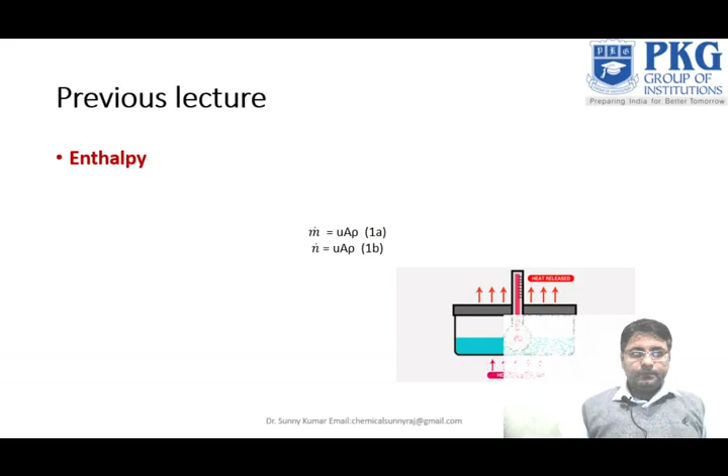Okay, so now we will start our lecture. In the previous lecture we discussed enthalpy and the effects at constant volume and constant pressure, and we did some examples related to this at constant volume and constant pressure related to enthalpy and heat capacity. Also we defined what heat capacity is and how you can relate it in your surroundings, and related examples of heat capacity we did.

And in between we also discussed about the measures of flow. So these things we discussed in the previous lecture. We also defined the specific heat at constant volume, which is the change in internal energy over change in temperature. And we also discussed the specific heat at constant pressure, which is del H upon del T at constant pressure. So these things related to heat capacity we discussed in the previous lecture, and we also solved examples related to this, and also discussed the measures of flow.

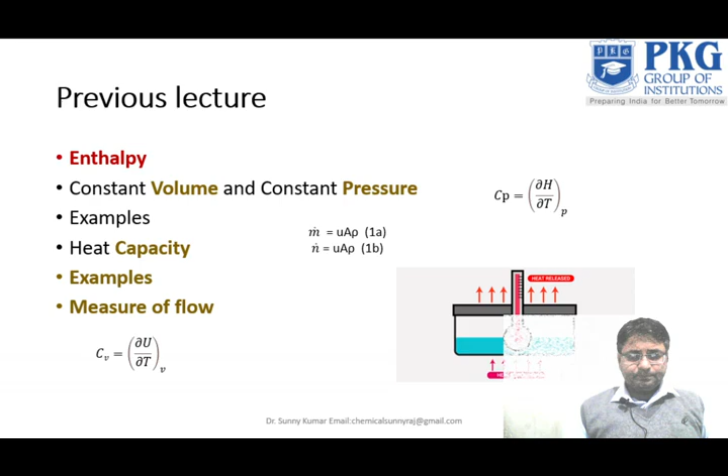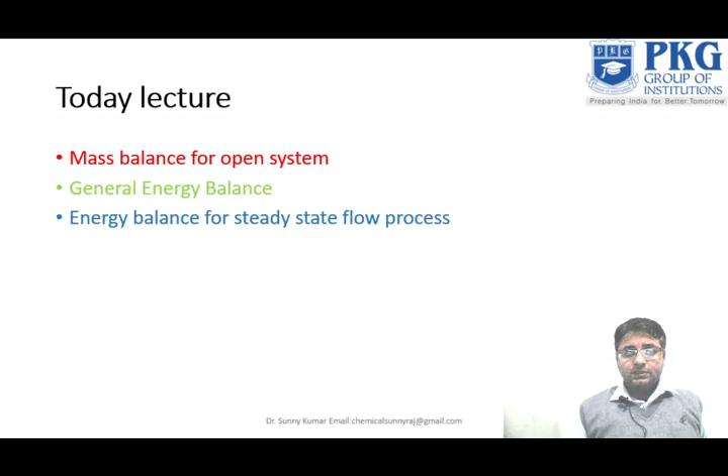So in today's lecture we will discuss about the mass balance for open system and the general energy balance for steady state flow process, and related examples of this. So this is what we will discuss today.

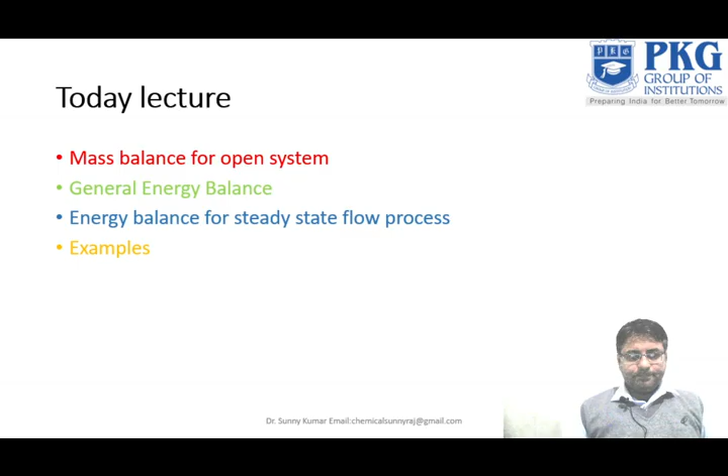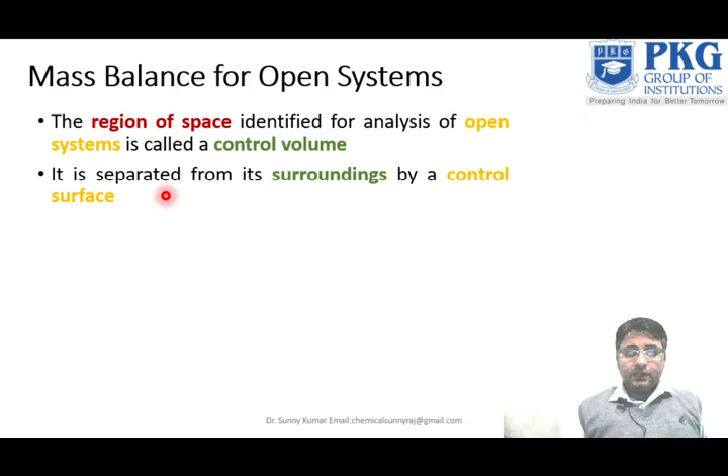Okay, so now I will tell you about what is the mass balance for the open system, how we can define the mass balance for an open system. The region of space identified for analysis of an open system is called the control volume. It is separated from its surroundings by a control surface. The fluid within the control volume is a thermodynamic system for which mass and energy balance are written.

Because mass is conserved, the rate of change of mass within the control volume, del m cv divided by dt, equals the net rate of flow of mass into the control volume. So the convention is that the flow is positive when directed into the control volume and negative when directed out.

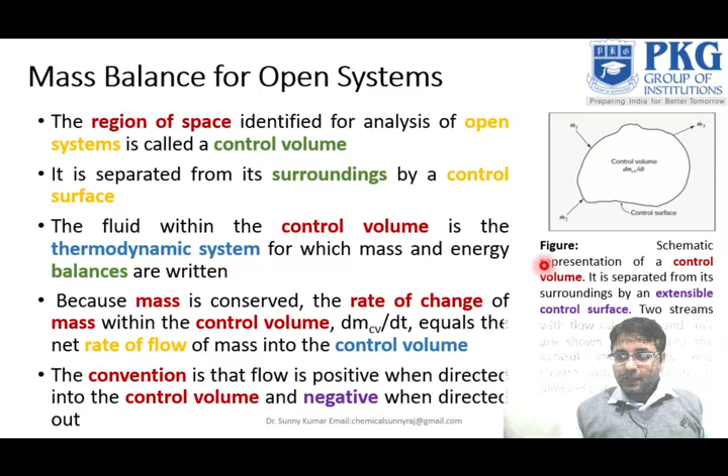For the control volume, the second term, which you can represent if you see the control volume, so you have seen that one. So there is M1, M2 in, and M3 out. So you can also write M3 as positive direction, out is positive direction, and M1, M2 is in negative direction. So you can easily write like this.

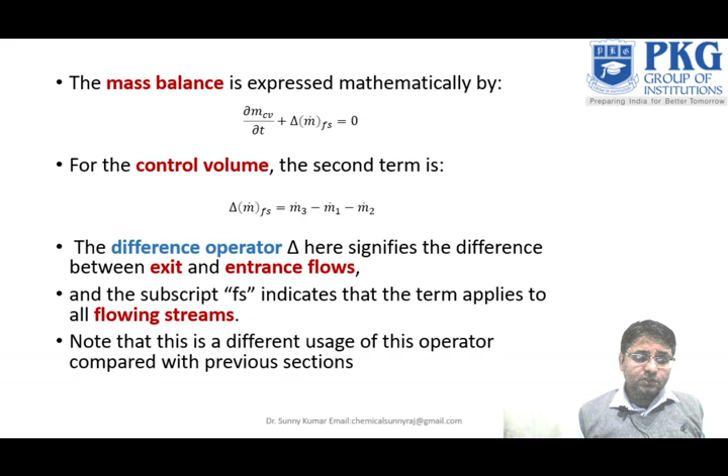The difference operator delta here signifies the difference between exit and entrance flow, and the subscript Fs indicates that the term applies to all flowing streams. Note that this is a different usage of the operator compared with the previous section. In the previous section we also used these types of terms, which were separated, but this is a different term we are using here.

Where the difference is between an initial state and the final state, both usages of the difference operator are common, and care must be taken to ensure that the correct sense is understood.

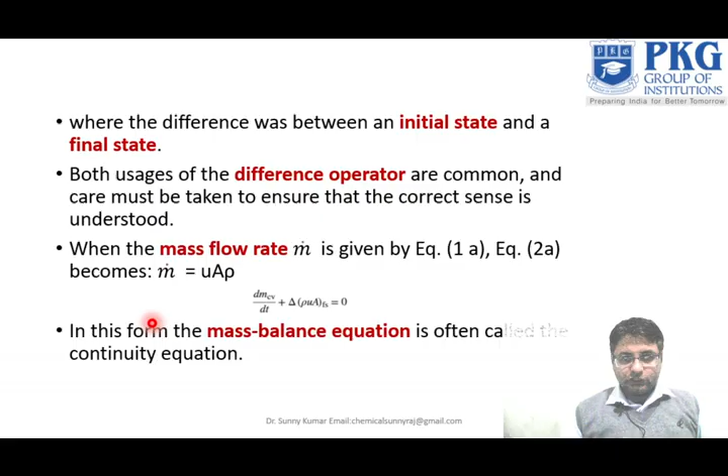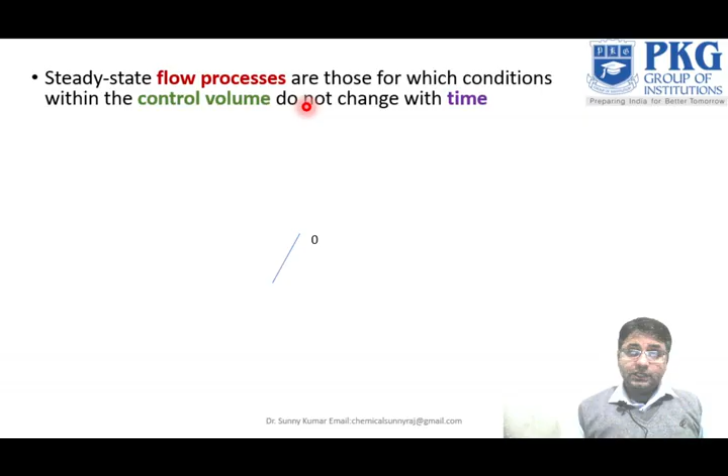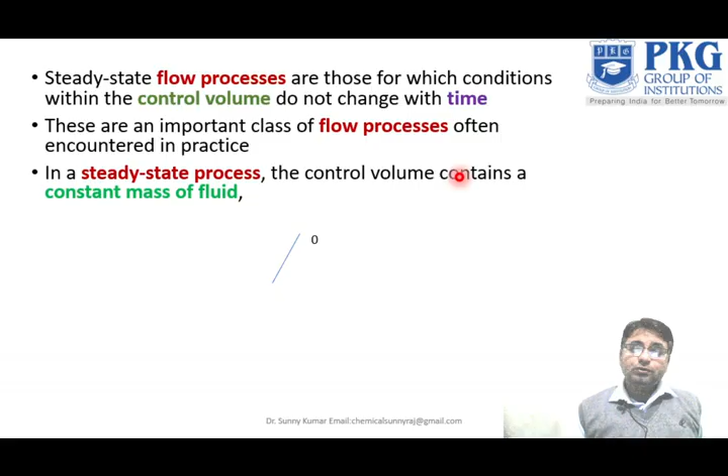Next, the steady state. Steady state flow processes are those for which conditions within the control volume do not change with time. These are an important class of flow processes often encountered in practice. In a steady state process, the control volume contains a constant mass of fluid, so the accumulation term of equation 2a is 0, reducing it to equation 2.

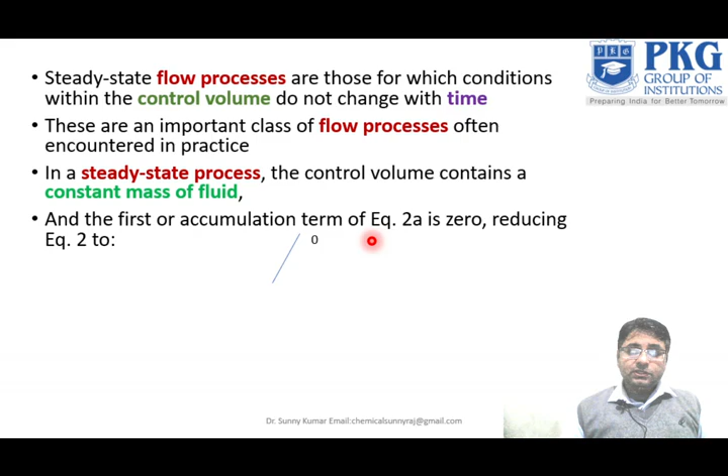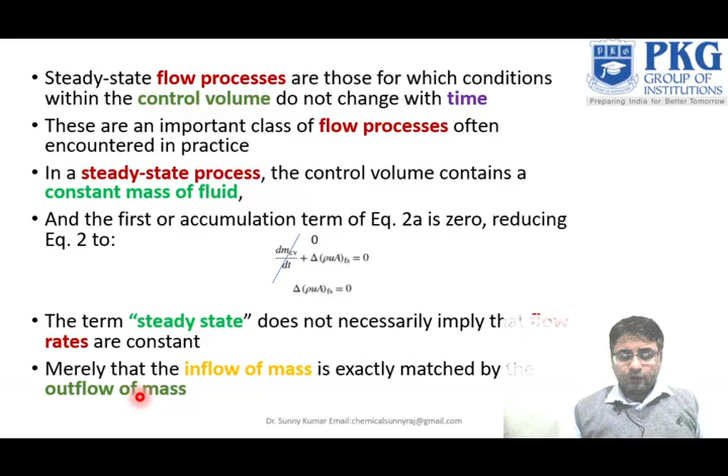When talking about steady state, there is no flow accumulation in the control volume; the mass is constant, so there is no change in mass with respect to time. Only del rho UA remains, simplifying to del rho UA Fs equal to 0. So the term steady state does not necessarily imply that the flow rates are constant, merely that the inflow of mass is exactly matched by the outflow of mass.

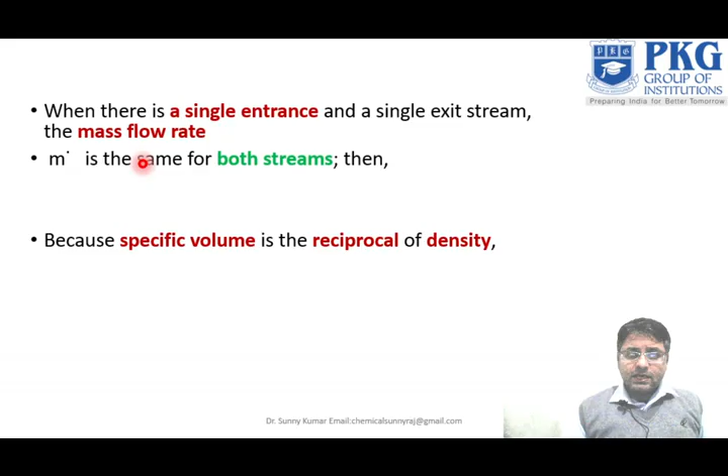Where there is a single entrance and a single exit stream, the mass flow rate m dot is the same for both streams. So m dot is constant, giving rho 2 u2 a2 equal to rho 1 u1 a1. If 1 represents in and 2 represents out, you can easily write rho 2 u2 a2 equal to rho 1 u1 a1.

The specific volume is the reciprocal of the density. So m dot, which is equal to u1 a1 v1, is equal to u2 a2 v2, equal to ua v. This is the form of the continuity equation that finds frequent use.

It is a very common use of this continuity equation. Generally in fluid mechanics we very frequently use this equation for calculating the mass flow rate at outlets or intermediate points. We can also calculate the mass flow rate for designing pipes; this continuity equation can also be used for that.

Now we will discuss the general energy balance. Because energy, like mass, is conserved, the rate of change of energy within the control volume equals the net rate of energy transfer into the control volume. A stream flowing into and out of the control volume has associated with it energy in its internal, potential, and kinetic forms, and all may contribute to the energy changes of the system, and each unit mass of a stream carries with it total energy.

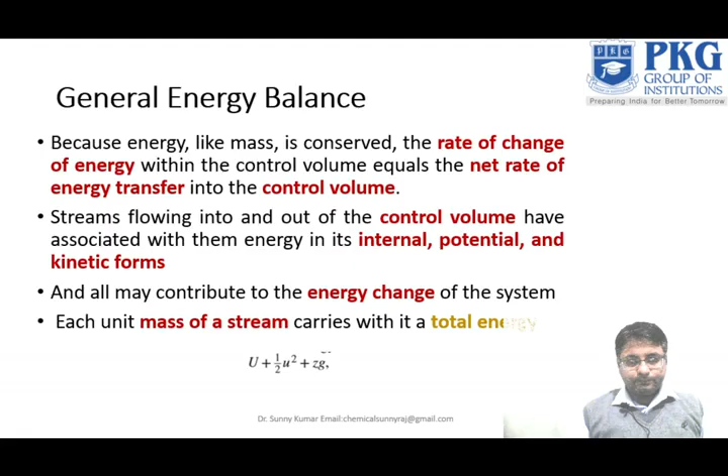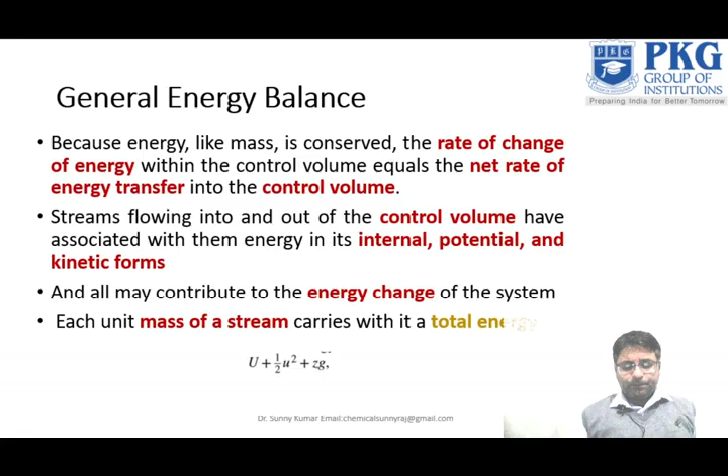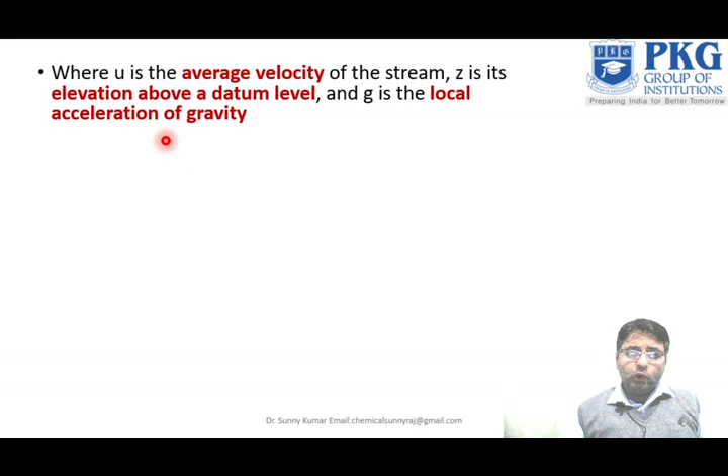This total energy is U plus 1 upon 2 U squared plus ZG. Here the internal energy is U, the kinetic energy is 1 by 2 U squared, and the potential energy is ZG, where U is the average velocity of the stream, Z is its elevation above a datum level, and G is the local acceleration of gravity.

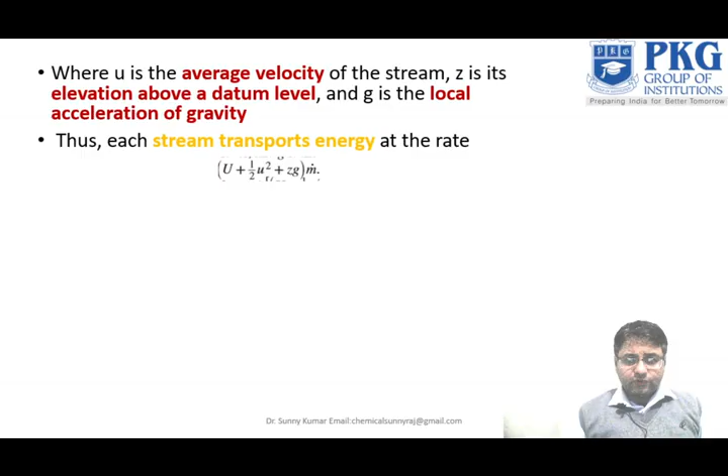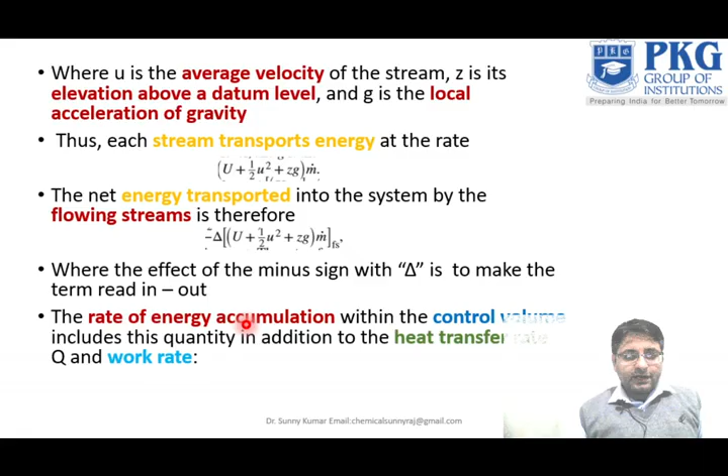So the rate, m dot, you have to multiply with the mass flow rate, and the net energy transport into the system by the flowing stream is therefore minus del of u plus 1 by 2 u square plus zg, times m dot fs. This is the flowing stream, where the effect of the minus sign with del is to make the terms read in minus out. So the rate of energy accumulation within the control volume includes this quantity in addition to the heat transfer rate Q and the work rate.

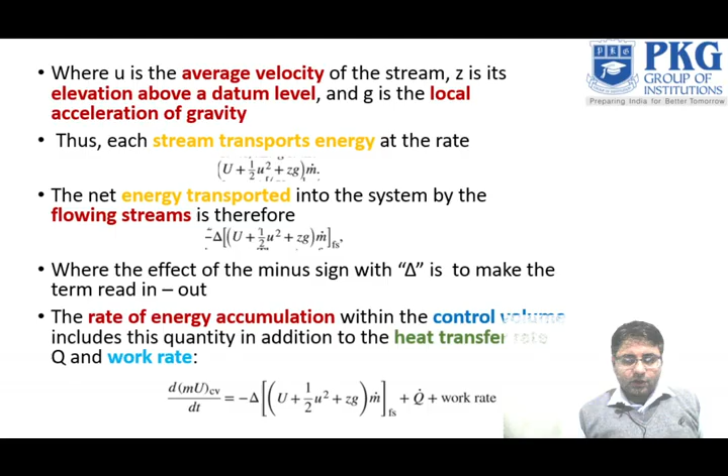So this energy equation will be d m U for the control volume upon d t, which is the rate of change of internal energy for the control volume, minus del of u plus 1 by 2 u square plus zg, times m dot fs, plus heat transfer rate plus work rate. So this is the internal energy, this is the kinetic energy, and this is the potential energy, and this is the heat transfer rate, and this is the work rate. All these terms we have to include for the general energy equation.

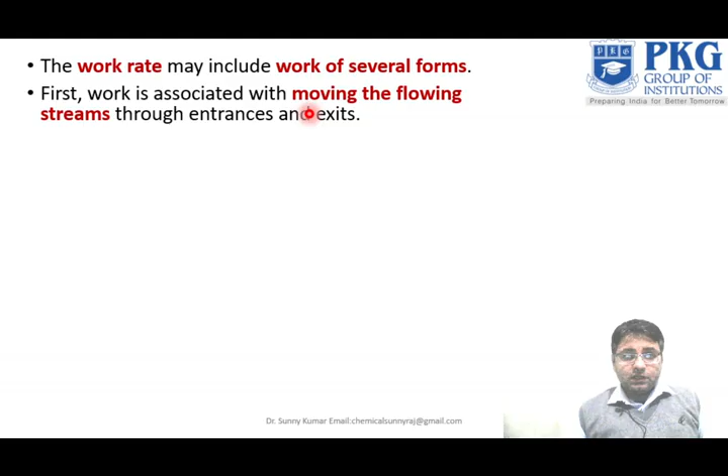The work may include of several forms. This work is associated with moving the flowing stream through entrance and exit. The fluid at any entrance or exit has a set of average properties: pressure, volume, internal energy and enthalpy, and others also.

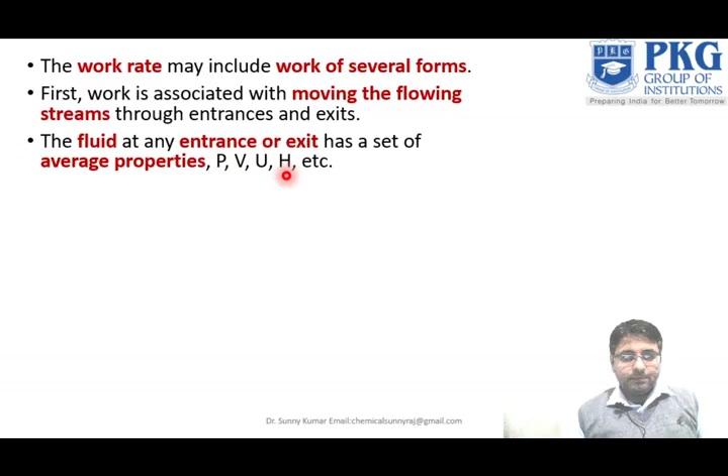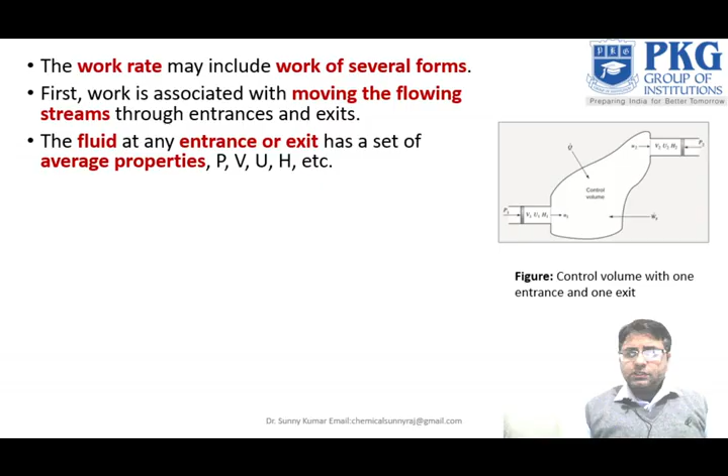And this is the outlet. Here also we are applying the pressure P2, and this is V2, U2 and H2, whatever the changes in internal energy, enthalpy and the velocity, you can see for this system. Now this is the control volume with one entrance and one exit. So imagine that a unit mass of fluid with these properties exists at an entrance or exit as shown in figure.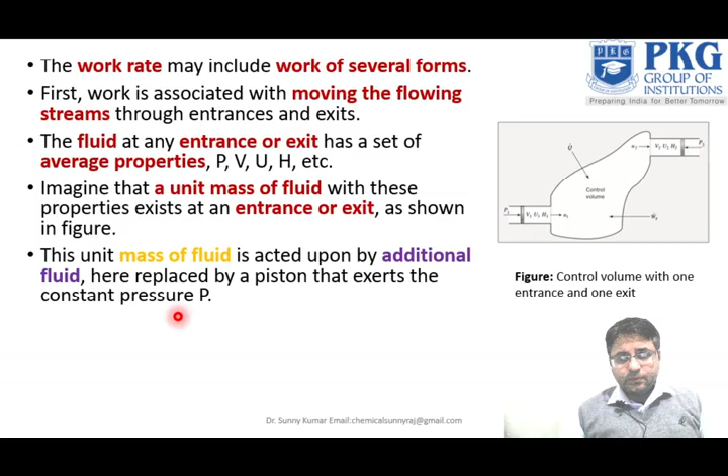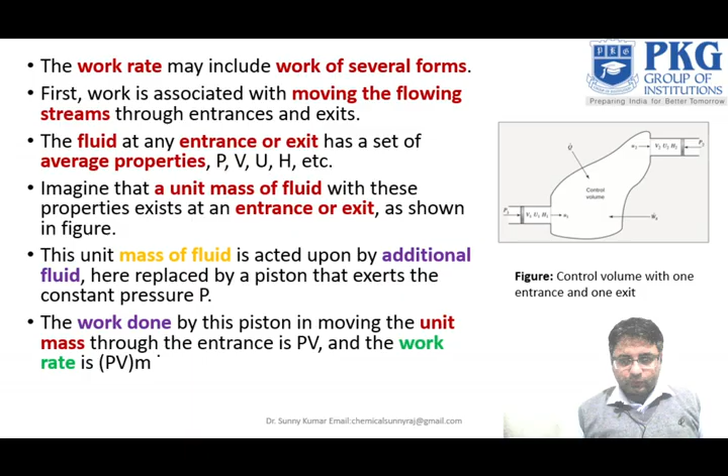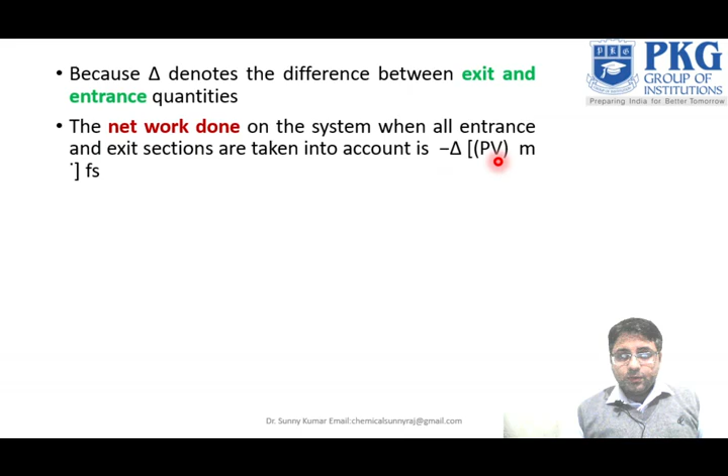This unit mass of fluid is acted upon by additional fluid, here replaced by a piston that exerts constant pressure. The work done by this piston in moving the unit mass through the entrance is PV, and the work rate is PV times m dot. Because this del denotes the difference between exit and entrance quantities, the net work done on the system when all entrance and exit sections are taken into account can be written as minus del PV m dot for the flow stream, Fs being the flow stream.

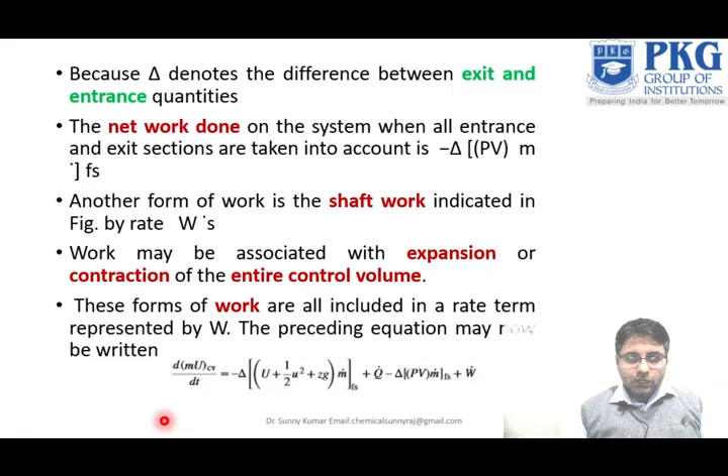Another form of work is shaft work, indicated in the figure by rate W. Work may also be associated with expansion or contraction of the entire control volume. These forms of work are all included in rate terms represented by W. The preceding equation may now be written as: del m u cv upon del t remains, minus del of u plus 1 by 2 u square plus zg, times m dot fs, also remains, plus q dot the same, but now minus del pv m dot fs plus w dot.

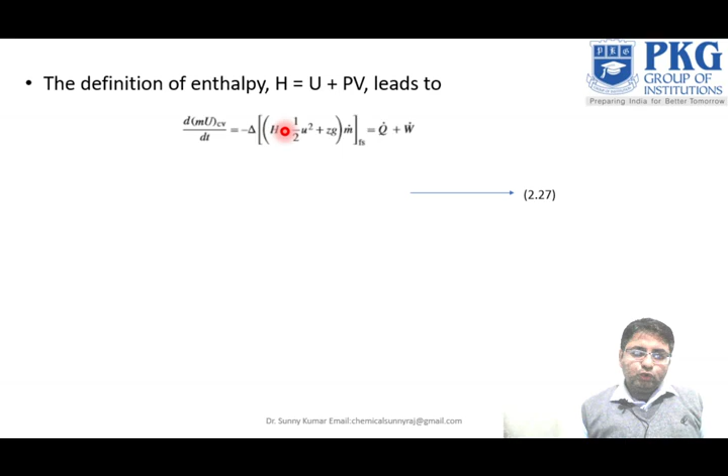So these two terms we have to include for the work done, this is the total work done by our system. So the definition of enthalpy, H equal to U plus PV, we know this. So if you put this instead of internal energy U, what will happen? You get del of H plus 1 by 2 u square plus zg, times m dot, equal to Q dot plus W.

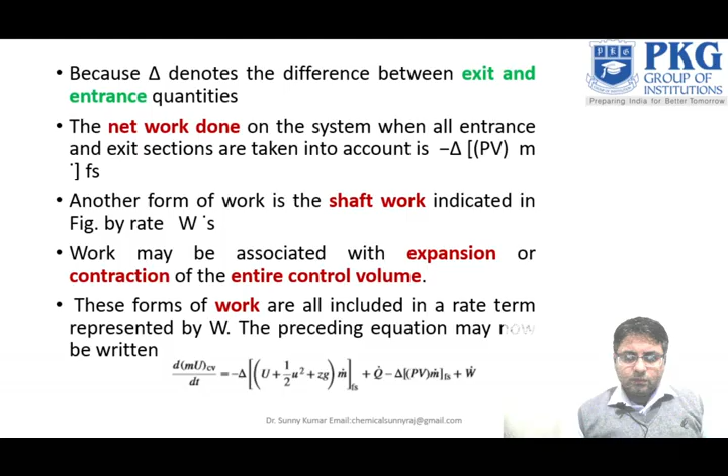And actually here it is a plus sign, it is a plus sign here, not equal to, this is a mistake. So for del m u cv upon del t, if you rearrange the equation, you can put plus del of H plus 1 by 2 u square plus zg, times m dot fs, which is equal to Q plus W. So you will get this.

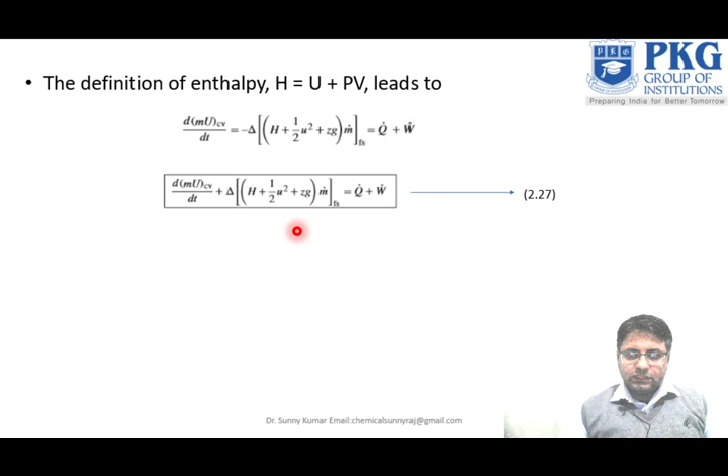Actually, you are seeing that in the previous equation we have added the PV term and U term, so if you combine this you will get H. So this is the thing you will see. The velocity u in the kinetic energy term is the bulk mean velocity as defined by the equation u equal to m upon rho a.

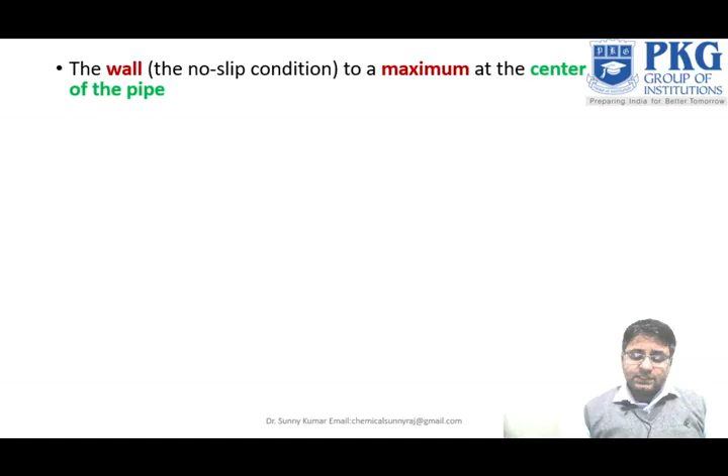So the kinetic energy of the fluid in a pipe depends on the velocity profile. For the case of laminar flow, the profile is parabolic, and integration across the pipe shows that the kinetic energy term should properly be u squared.

In fully developed turbulent flow, the more common case in practice, the velocity across the major portion of the pipe is not far from uniform, and the expression u squared divided by 2 as used in the energy equation is more nearly correct.

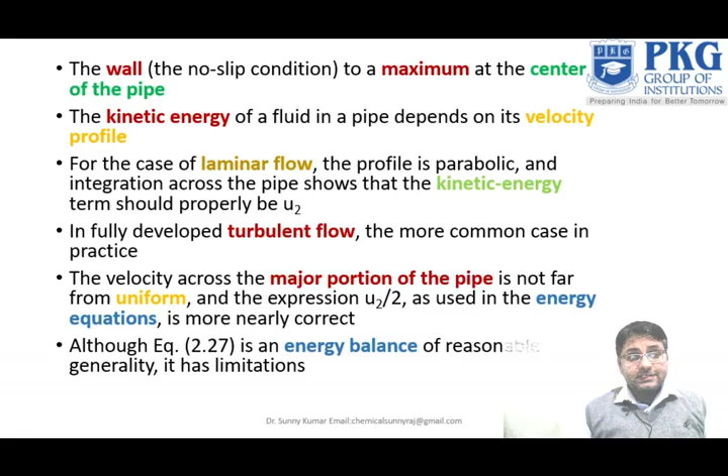Although in the previous equation, the 2.27 equation, the energy balance is reasonably general, this will be the general equation, but it has some limitations also. In a particular case, it reflects the tacit assumption that the center of mass of the control volume is stationary.

If we say the assumption is that the center of mass of the control volume is stationary, thus no terms for the kinetic and potential energy change of the fluids in the control volume are included.

For virtually all applications of interest to chemical engineers, the 2.27 equation is very important. For many applications, kinetic and potential energy changes in the flowing streams are also negligible. In some cases, they are negligible only.

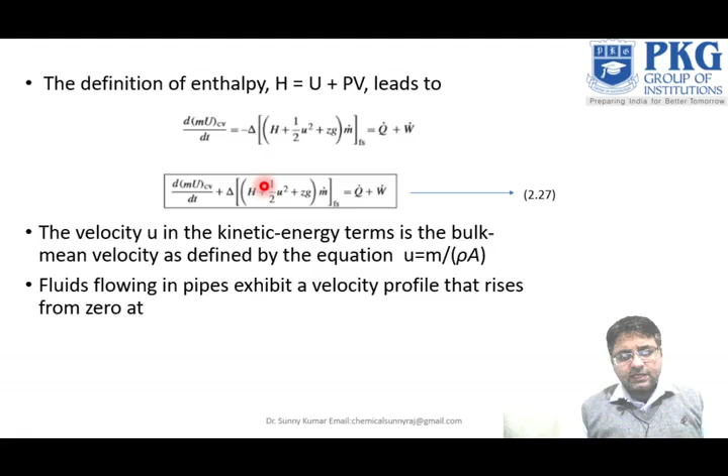So if we simplify that equation, the previous general equation, the kinetic energy and potential energy terms will cancel out. So these two terms, u squared and zg terms, will cancel out, only h will remain, and Q plus W will remain. So this is our equation when we are neglecting the kinetic and potential energy for the system.

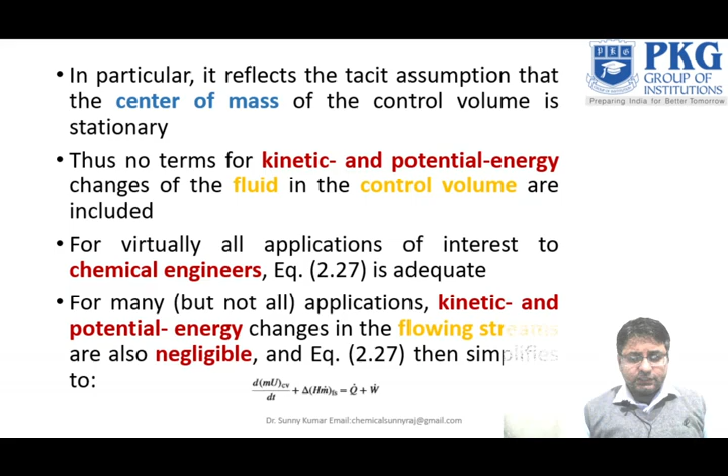So now we will do some examples related to this general energy balance. An insulated, electrically heated tank for hot water, contains 190 kilogram of liquid water at 60 degree centigrade.

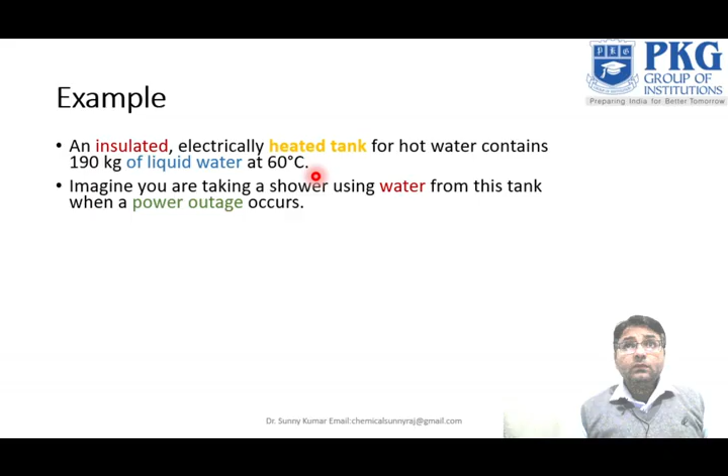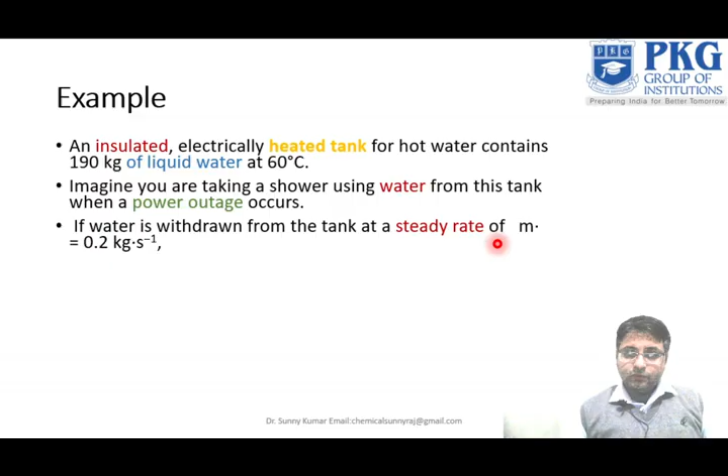Imagine you are taking a shower using the water from this tank when a power outage occurs. If water is withdrawn from the tank at a steady rate of m dot, which is equal to 0.2 kilogram per second, how long will it take for the temperature of the water in the tank to drop from 60 to 35 degrees centigrade? So if you are cooling the water, how much time is required? So this is an example.

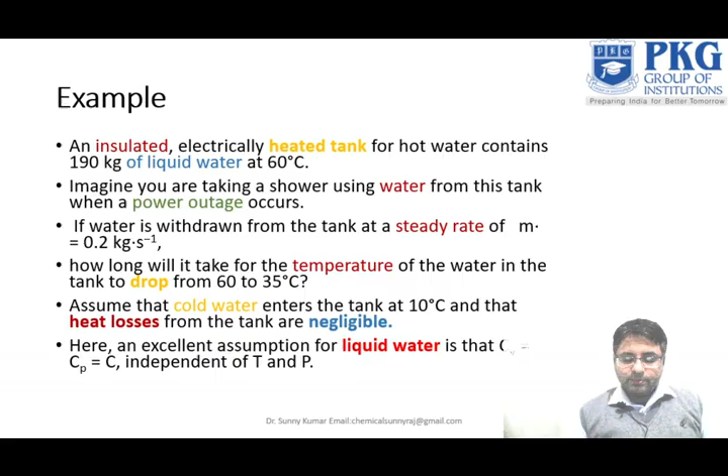So the assumptions are that the cold water enters the tank at 10 degrees centigrade, and that heat losses from the tank are negligible. Here an excellent assumption for liquid water is that Cv equals Cp equals C. So at constant volume and constant pressure, the heat capacity remains constant, the same, independent of temperature and pressure.

So now we will solve this system. This is an example of application of equation 2.28, the previous equation, when neglecting the potential energy and kinetic energy. So Q equals W equals 0 at the transient process.

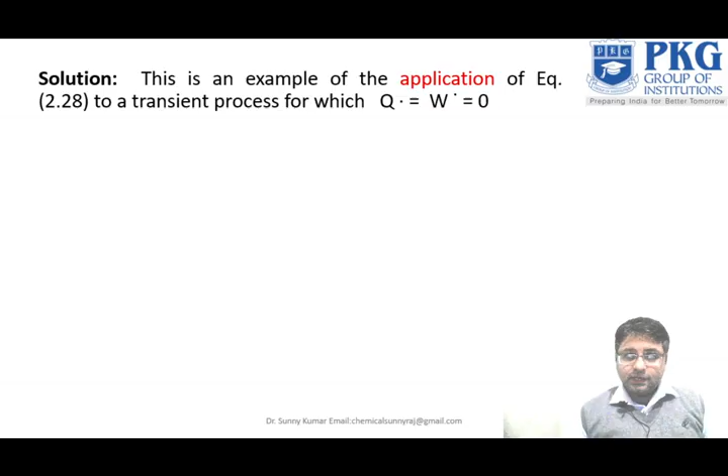We assume perfect mixing of the content of the tank. This implies that the properties of the water leaving the tank are those of the water in the tank. With the mass flow rate into the tank equal to the mass flow rate out, M_CV is constant, and moreover the difference between the inlet and outlet kinetic and potential energies can be negligible.

So we have already, this 2.28 equation will be used there. So equation 1 is therefore written, this one. So here only the enthalpy terms, and the heat and work, and the rate of change are there. No kinetic and potential energy is there in this equation.

But heat, there is no heat loss, no heat transferring, and the work done is also 0 because it is a transient process. So you can write this equation like this: m del U upon del t plus m dot, h minus h1.

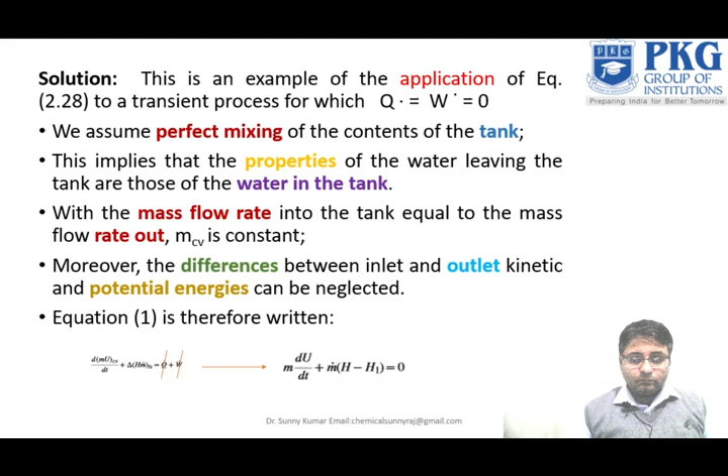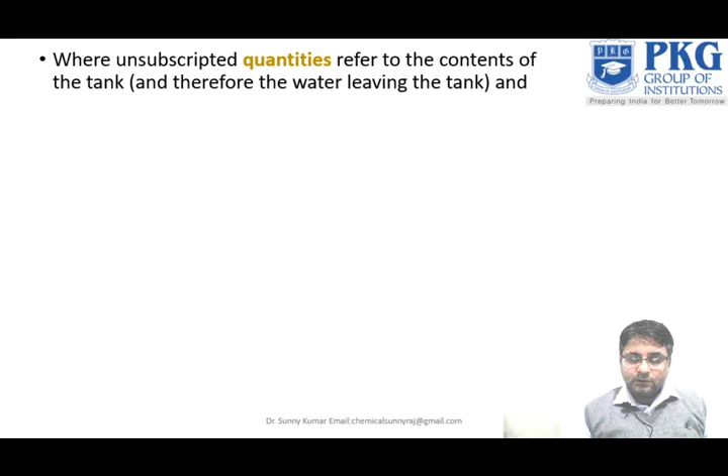Okay, so where the unsubscripted quantities refer to the content of the tank, where we have not subscribed anything, that will be inside the tank, and the water leaving the tank, you can see that. And H1 is the specific enthalpy of the water which is entering the tank, which is inside this tank, which is H1.

With Cv equal to Cp equal to C, del U upon del T equal to C del T upon del T. So H minus H1 equal to C times T minus T1. You can also write it like this.

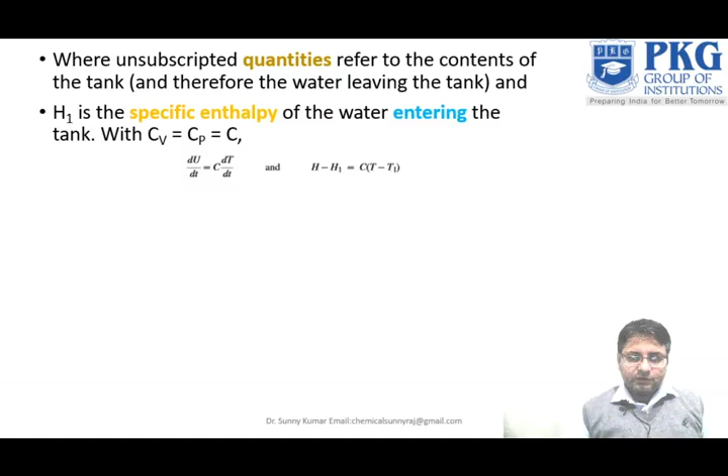So the energy balance then becomes, on rearrangement, del T equal to minus M upon m dot, del T upon T minus T1.

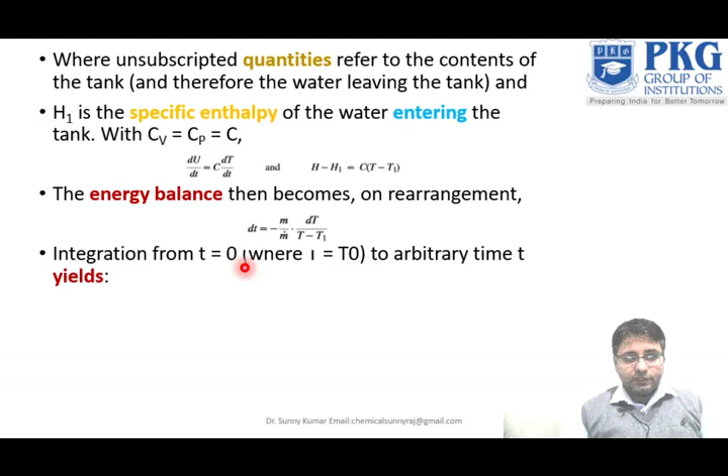If you integrate this equation from t equals 0, where T equals T0, to an arbitrary time T, it yields t equals minus M upon m dot, ln of (T minus T1) over (T0 minus T1).

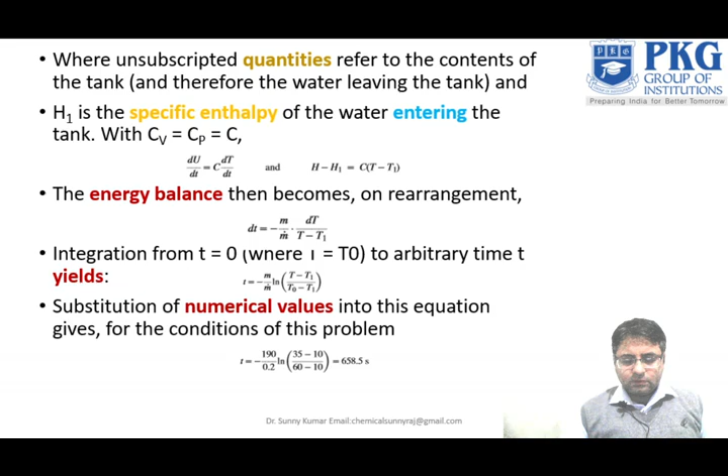Substitute the numerical values into the equation for the conditions of the problem. So the conditions given are minus 190 and 0.2 ln of (35 minus 10) over (60 minus 10). These conditions are already given, and so you will get the total time.

658.5 seconds. So thus the water temperature in the tank will drop from 60 degree centigrade to 35 degree centigrade after about 11 minutes. If you divide 658.5 by 60, it is around 11 minutes to cool the water. So this is the dropping of the water temperature we can easily calculate.

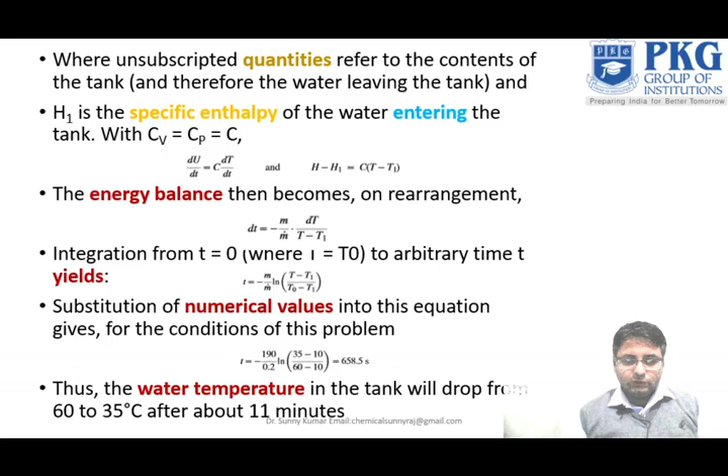Now for the next topic, we will read about energy balance for steady state flow process. The flow process for which the accumulation term of equation 2.28, d(mU)cv/dt, is 0 is said to occur as steady state.

Steady state we have already discussed: when there is no change with time in internal energy, that term will be 0. So this is equation 2.28.

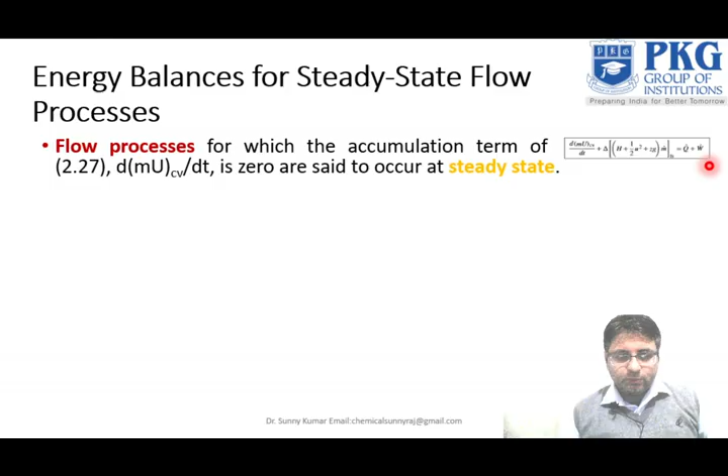You can see here: del(mu) upon del T, plus del[(H plus 1/2 u square plus Zg) m dot]_Fs equals q dot plus w dot. So this is the full equation. Only these terms will be 0 because it is in steady state.

As discussed with respect to the mass balance, this means that the mass of the system within the control volume is constant. It also means that no change occurs with time, so this term is 0 because there is no change with time.

And the properties of the fluid within the control volume, nor at its entrance or exit, so there is no expansion of the control volume possible under these circumstances.

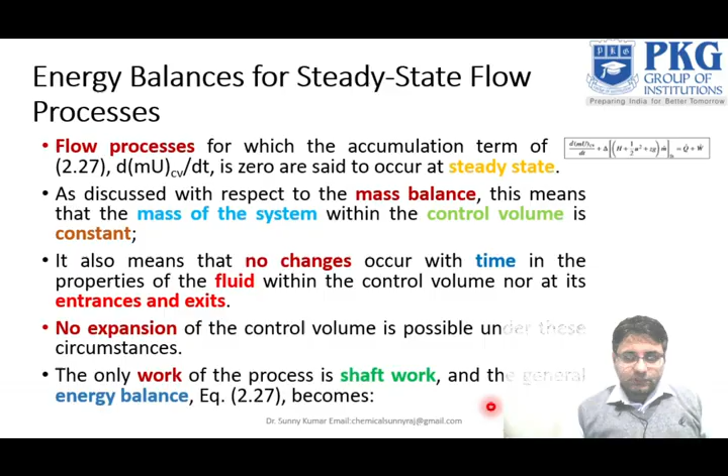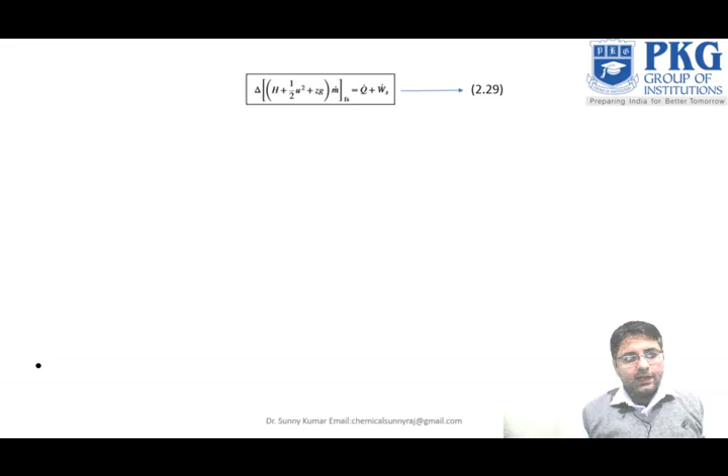So the only work of the process is shaft work, and the general energy balance equation becomes like this: the change in internal energy will be 0 with time, that is 0.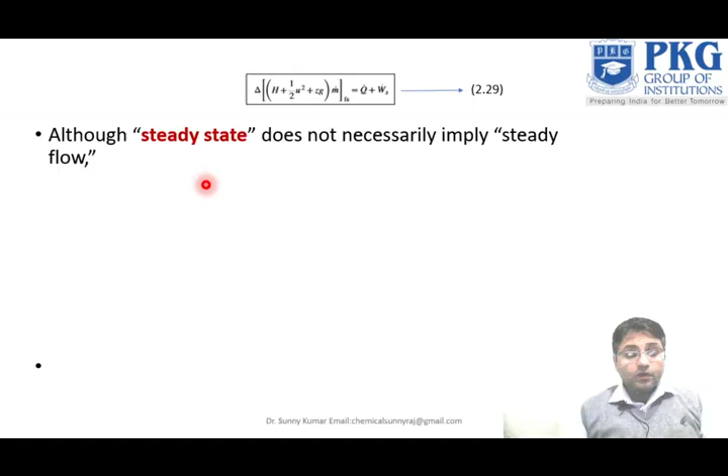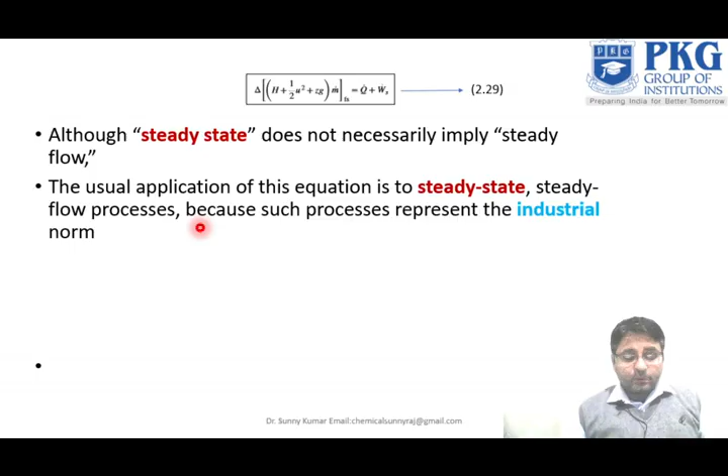Although steady state does not necessarily imply steady flow, the usual application of this equation is to steady state steady flow processes, because such processes represent the industrial norm.

Further specialization results when the control volume has one entrance and one exit. The same mass flow rate m dot then applies to both streams, and equation 2.29 reduces to...

So the equation now reduces to del[H plus 1/2 u square plus Zg] m equals q dot plus w dot s. So this will be the equation you can write for the steady state system.

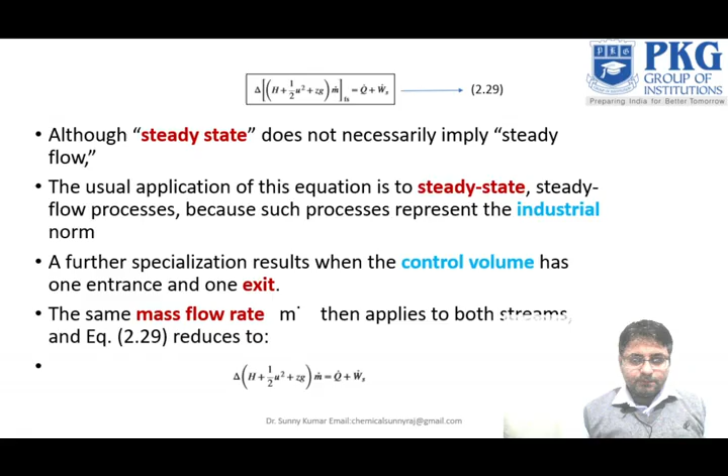Where this Fs subscript for the flowing streams has been omitted in these simple cases, and the del denotes the changes from the entrance to the exit.

And if you divide by this mass flow rate m dot: del[H plus 1/2 u square plus Zg] equals q dot upon m dot plus w s dot upon m dot, which is equal to q plus ws.

So you can also write, if you rearrange this equation: del H plus del(u square)/2 plus g del z equals q plus ws.

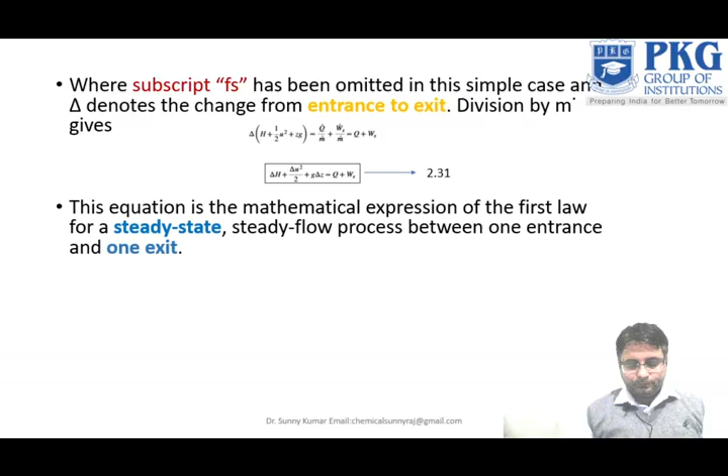So all terms represent energy per unit mass of fluid, and the energy unit is usually the joule. So for the whole equation, the unit will be the joule.

In many applications the kinetic and potential energy terms are omitted because they are negligible compared with the other terms. In the previous example there were no kinetic and potential energy terms, so we used that form, but there was a rate of change with time, and we calculated how much time was required to cool the system.

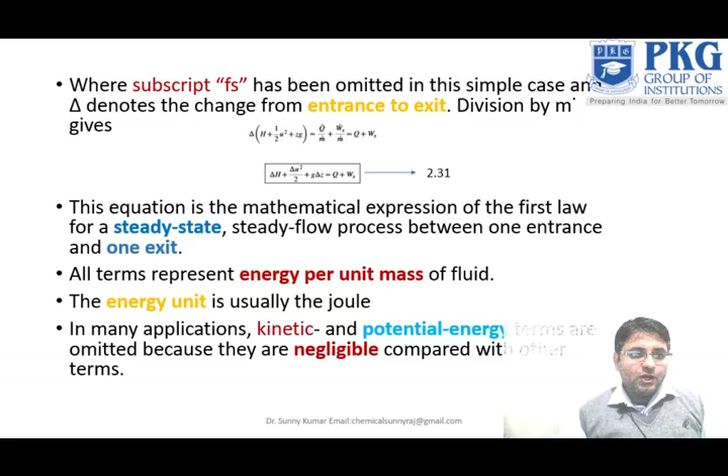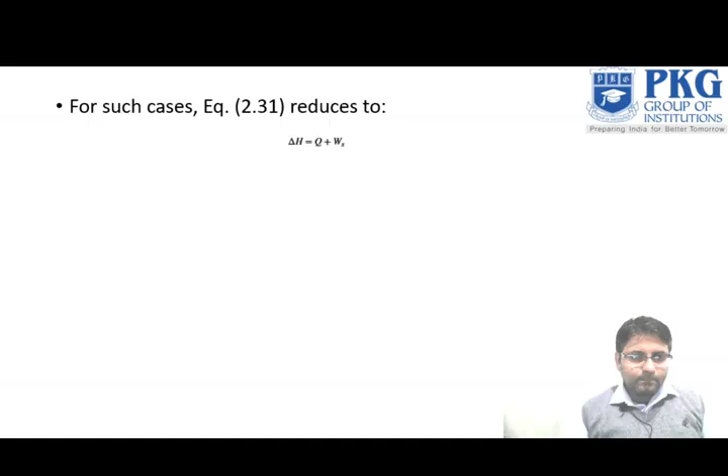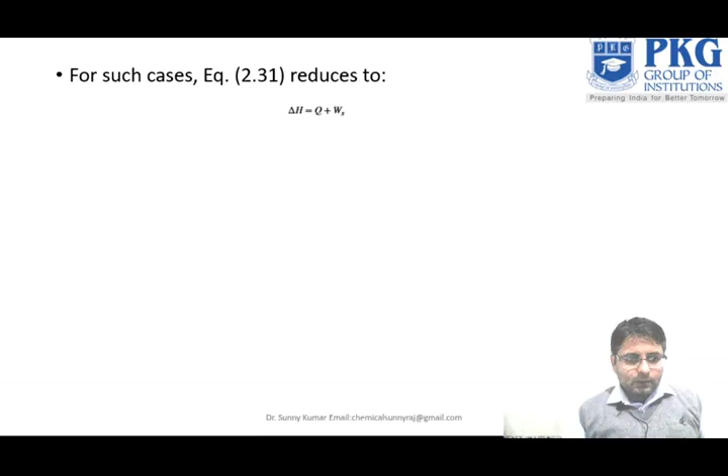Del H equal to Q plus Ws. This expression of the first law for a steady state flow process is analogous to equation 2.3. It is very similar to the internal energy equation, which is del U equal to Q plus W for the non-flow process.

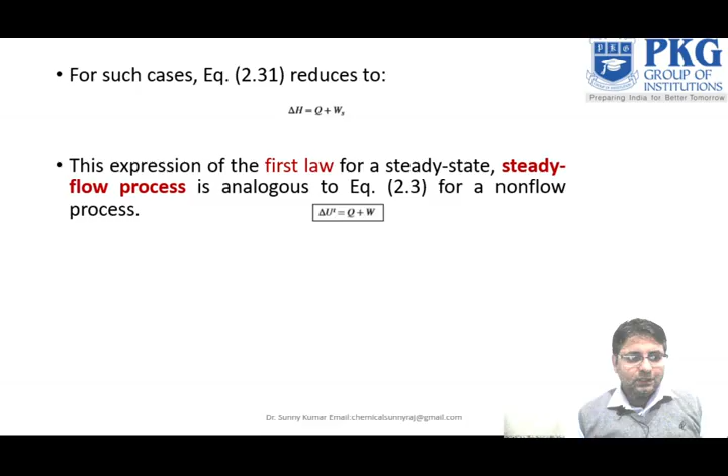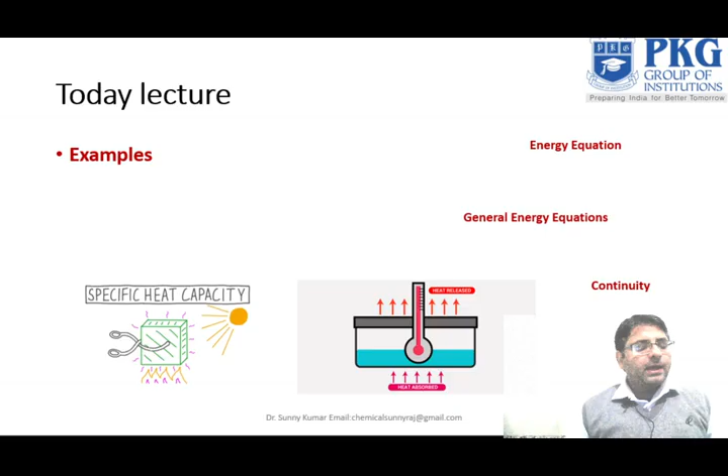So in today's lecture we have discussed some examples and the mass balance for open systems, the mass energy balance for open and closed systems, and the general energy balance equation. We have also discussed the energy balance for steady state, and the mass balance for steady state, and the continuity equation.

We have described this general energy equation here. In some cases, when there is no kinetic and potential energy, those terms will be negligible, so you can directly use the simplified equation.

And for the steady state, this term will be zero. This is the continuity equation: m dot equal to u1 a1 upon v1 equal to u2 a2 upon v2 equal to ua upon v, where v is the specific volume, and instead of v1 you can also write rho, which is the density.

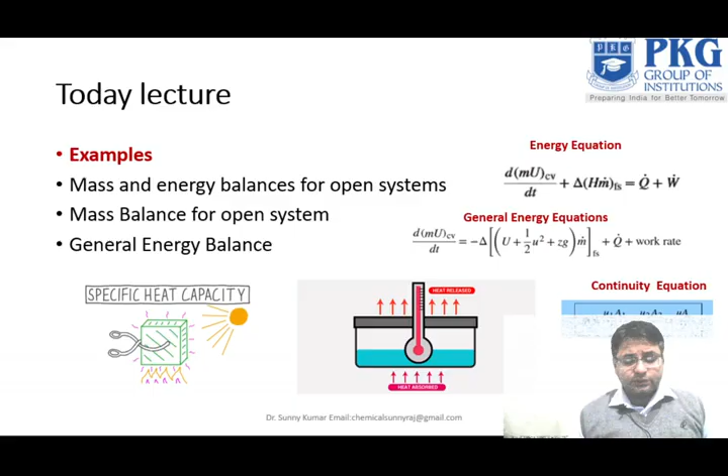In the next lecture we will discuss what we covered today regarding steady state flow process, and how we can utilize steady state flow process. We will do some examples related to this, and try to solve some unsolved problems of energy balance and mass balance.